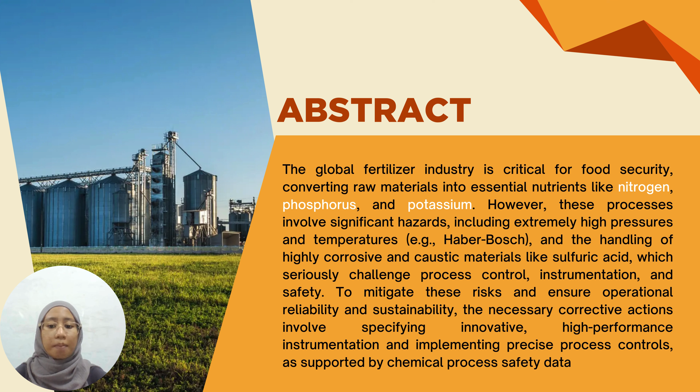To mitigate this risk and ensure operational reliability and sustainability, the necessary corrective action involves specifying innovative, high-performance instrumentation and implementing precise process control as supported by chemical process safety data.

Now, let's get into the introduction. The fertilizer industry is fundamental to modern agriculture and crucial for global food security, providing the three essential macronutrients required to boost crop yield. The necessity is amplified by the need to feed an estimated 10.9 billion global population by the century's end, and by the growing demand for biofuels derived from crops.

Now, let me explain the three main fertilizers, also known as NPK. First, we have the nitrate fertilizer, where the foundation is the Haber-Bosch process, which synthesizes ammonia by reacting nitrogen sourced from the air and hydrogen, typically sourced from natural gas.

The product is then used to create essential products like nitric acid, ammonium nitrate, and urea. The Haber-Bosch process is extremely energy intensive and requires extremely high pressure and precise temperature control to function efficiently.

Second, we have the phosphate fertilizer, where the main process is the wet process. This involves chemically treating the mined phosphate rock with sulfuric acid. The direct product of the wet process is phosphoric acid, which is used to make final phosphate fertilizers like triple superphosphate (TSP) and diammonium phosphate (DAP).

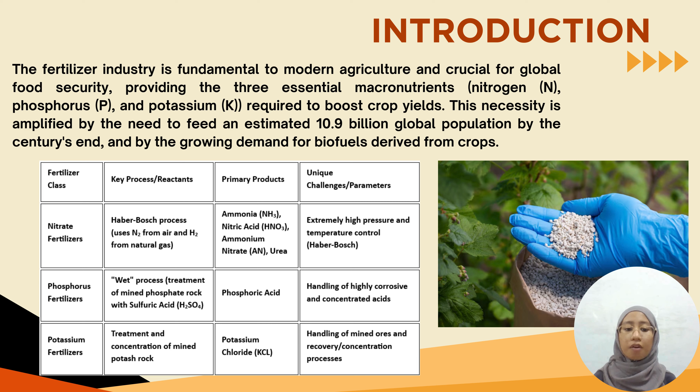The significance of our findings can be attributed to four key beneficiary groups. First, for the industry, our research highlights the need for high-specification instrumentation to boost plant reliability, minimize downtime, and ultimately increase profitability. Second, the study strongly emphasizes worker well-being. It is established that accurate monitoring and control are essential to create a safer work environment. This is vital for minimizing catastrophic failure, or exposure to hazardous materials such as strong acid and high temperature steam.

Third, the findings are critical for the government and regulators. We provide an evidence base on high-risk chemical environments to strengthen specific safety guidelines. This is especially relevant for environments characterized by extreme pressure and corrosive media.

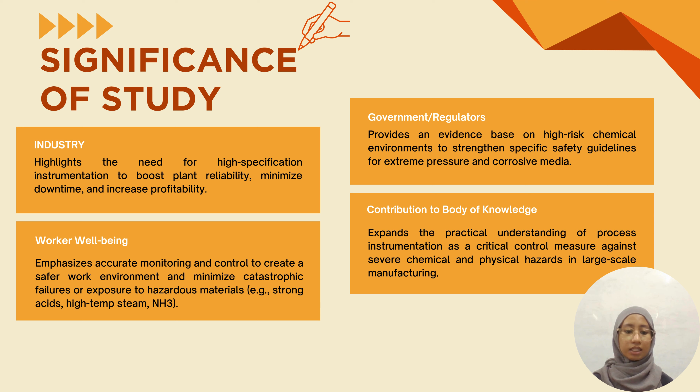Finally, in terms of contribution to the body of knowledge, this research expands the practical understanding of process instrumentation, and formally defines it as a critical control measure against chemical and physical hazards in large-scale manufacturing.

Now, let's dive into the objectives of the case study. Our first objective was hazard identification and assessment, to systematically identify and assess the primary chemical and physical hazards associated with all three production processes: nitrogen, phosphorus, and potassium.

Our second objective was to define the corrective action and solution. This involves suggesting suitable corrective actions, primarily focusing on process control and instrumentation, to either reduce the risk or eliminate the identified hazards in the fertilizer manufacturing plant.

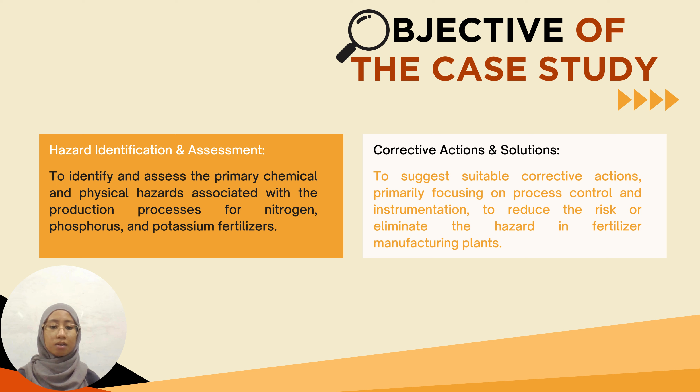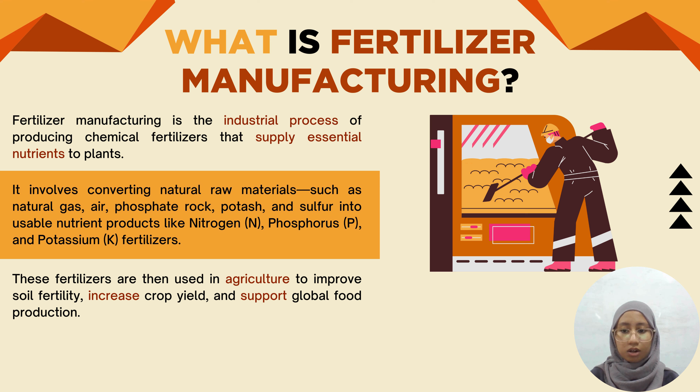We've been talking nonstop about fertilizer manufacturing, but what really is fertilizer manufacturing? Fertilizer manufacturing is the industrial process of producing chemical fertilizers that supply essential nutrients to plants. It involves converting natural raw materials such as natural gas, air, phosphate rock, potash, and sulfur into usable nutrient products like nitrogen, phosphorus, and potassium fertilizers. These fertilizers are then used in agriculture to improve soil fertility, increase crop yields, and support global food production.

So, why is fertilizer manufacturing important to us? First, it ensures global food security. Second, it increases crop yield and productivity. And it also supports soil fertility and soil health. And critically, it contributes to economic growth by stabilizing agriculture output.

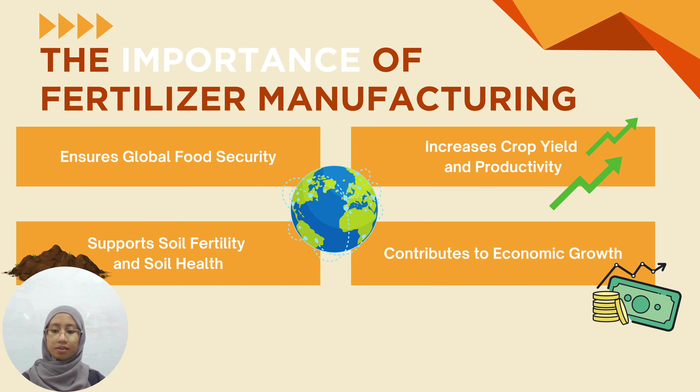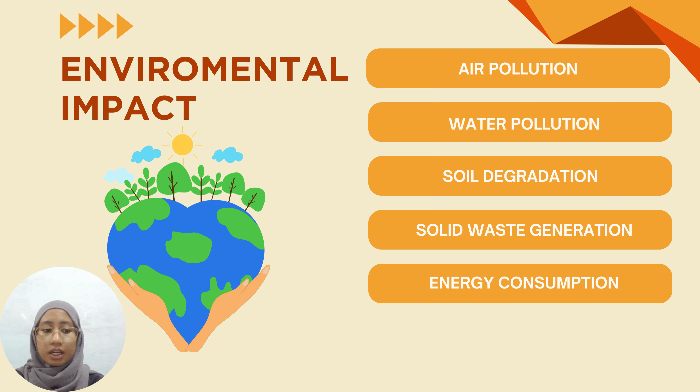However, meeting this global demand requires managing significant technical and environmental risks. The operation of this large-scale plant contributes to several environmental challenges, including air pollution, water pollution, soil degradation, and solid waste generation. Furthermore, the energy-intensive nature of processes like Haber-Bosch contributes heavily to energy consumption.

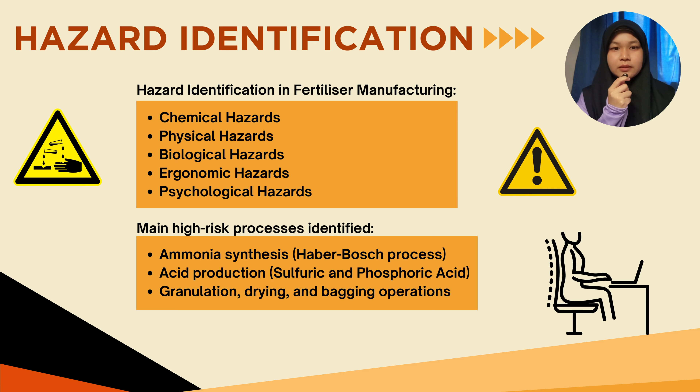For this case study, hazard identification was carried out across major fertilizer production processes. The hazards were classified into five main categories: chemical, physical, biological, ergonomic, and psychological hazards. The highest risks were identified in ammonia synthesis, acid handling processes, and downstream activities such as granulation and bagging.

Chemical hazards are the most significant risk in fertilizer manufacturing. Workers may be exposed to ammonia gas, corrosive acids such as sulfuric and phosphoric acid, and harmful dust particles. These chemicals can cause severe skin burns, eye injuries, and respiratory problems if accidental exposure occurs.

Physical hazards mainly come from high temperature and high pressure operations, especially in ammonia synthesis and drying processes. Noise from heavy machinery can lead to hearing loss, while dust and vibration increase the risk of accidents and long-term health issues.

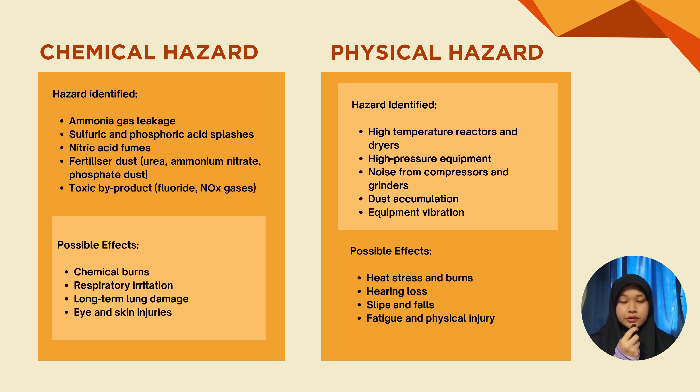Although less obvious, biological, ergonomic, and psychological hazards are also present. Moist environments can promote mold growth, heavy manual handling can cause musculoskeletal injuries, and continuous high-risk operations may lead to stress, fatigue, and reduced concentration.

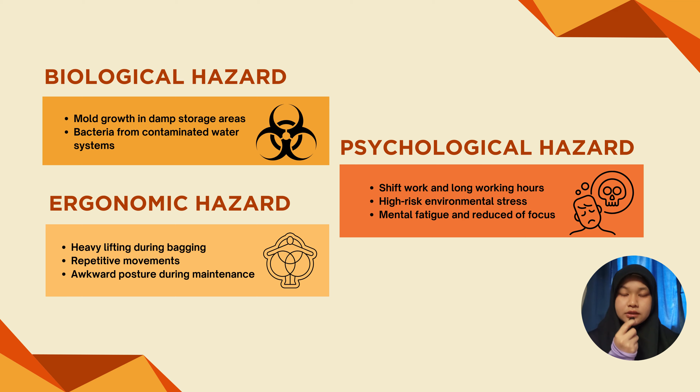Risk assessment was conducted using the standard risk matrix. Each hazard was evaluated based on its likelihood of occurrence and the severity of its consequences. The risk score is calculated by multiplying likelihood and severity.

Based on the risk matrix, ammonia gas leakage shows the highest risk level due to its high likelihood and catastrophic consequences. Most other hazards fall under medium risk, indicating that they require planned control measures. Equipment vibration was classified as low risk but still requires monitoring.

In summary, ammonia gas leakage represents the most critical hazard in fertilizer production. Most identified hazards fall under the medium risk category, meaning they require proper planning and control. Low-risk hazards should still be monitored to prevent future escalation.

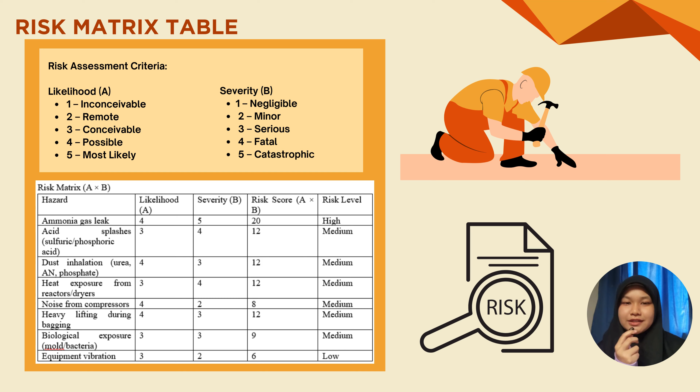Next, we are moving to the countermeasures. We chose two countermeasures from the hierarchy of control, which are engineering controls and administrative controls. For engineering control, we can install local exhaust ventilation (LEV) at the mixing, crushing, and packaging area to control dust and fume. Next, we can enclose noisy machines such as the sieve shaker machine with a soundproof cover to reduce sound transmission.

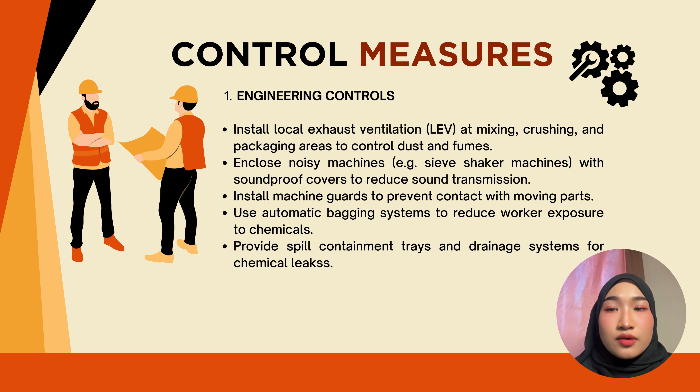Next, we can install machine guards to prevent contact with moving parts. We also can use an automatic bagging system to reduce workers' exposure to chemicals. And lastly, we can provide spill containment trays and a drainage system for chemical leaks.

Second is administrative control. We can develop standard operating procedures, SOP, for chemical handling and machine operation. We can also conduct regular safety training on chemical hazards, noise exposure, and emergency response. Other than that, we can limit exposure time in noisy areas through job rotation.

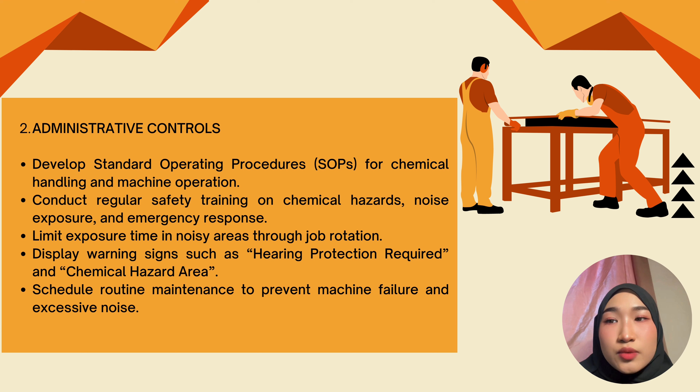And we can display warning signs such as "hearing protection required" and "chemical hazard area." Other than that, we can schedule routine maintenance to prevent machine failure and excessive noise.

Now we are moving to the recommendations. We have a few recommendations for this fertilizer company: the company should continuously improve its safety management system and risk assessment. Next, regular safety training and refresher courses should be conducted for all workers, and the employer should ensure all machinery is well maintained and complies with safety standards.

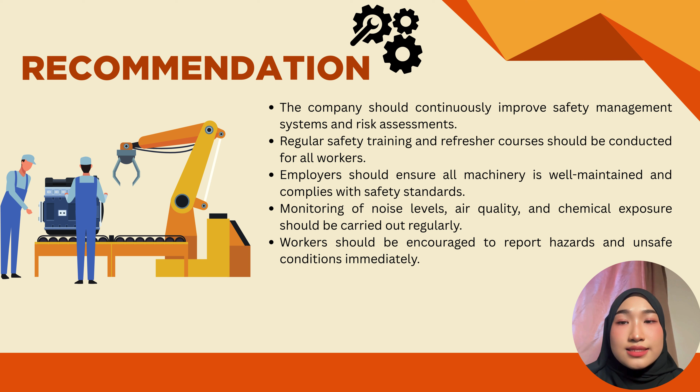Other than that, monitoring of noise levels, air quality and chemical exposure should be carried out regularly. And lastly, workers should be encouraged to report hazards and unsafe conditions immediately.

And now we are moving to the last part, which is the conclusion for this presentation. In conclusion, the fertilizer manufacturing industry involves various hazards such as chemical exposure, noise, dust, and ergonomic risk. Without proper countermeasures, these hazards can negatively affect worker health and safety and the environment.

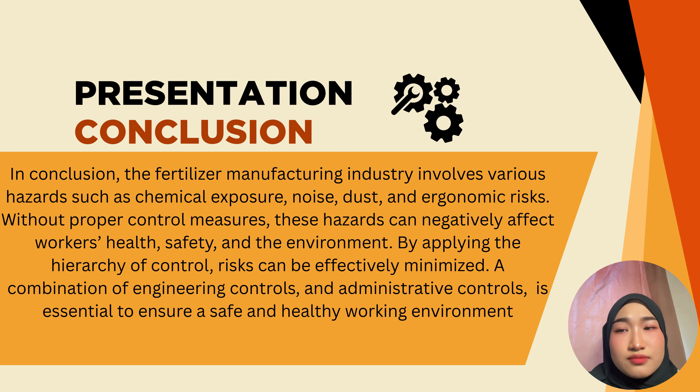By applying the hierarchy of control, risk can be effectively minimized. A combination of engineering control and administrative control is essential to ensure a safe and healthy working environment.